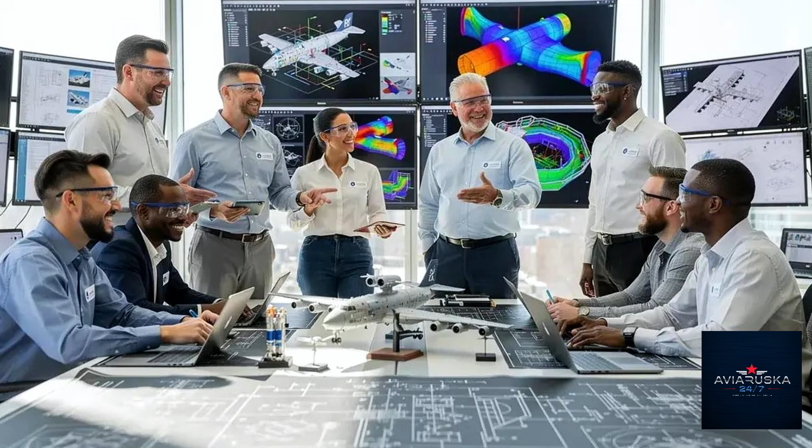The aircraft was the Irkut MC-21-300. The flight was May 28, 2017. And what nobody fully understood that morning was that this was only the beginning of a story far more complicated than anyone had planned for.

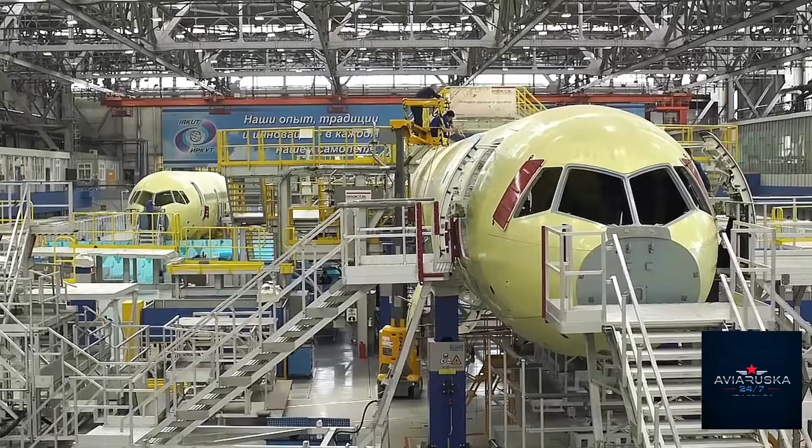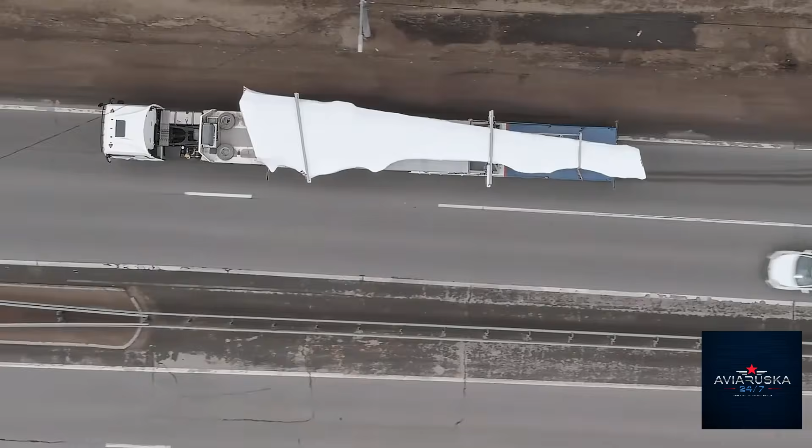To understand the MC-21, you have to understand what Russia's aviation industry looked like in the early 2000s. It wasn't pretty. The Soviet aerospace machine, once genuinely formidable, had largely collapsed after 1991. Aeroflot was flying aging Tupolevs and Ilyushins alongside a growing fleet of Boeings and Airbuses. Russian carriers were buying Western jets, not because they particularly wanted to, but because the domestic alternatives simply couldn't compete on economics, range, or passenger comfort.

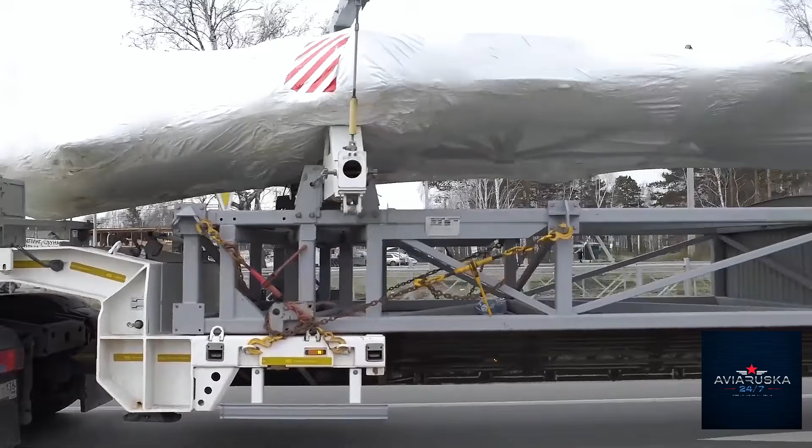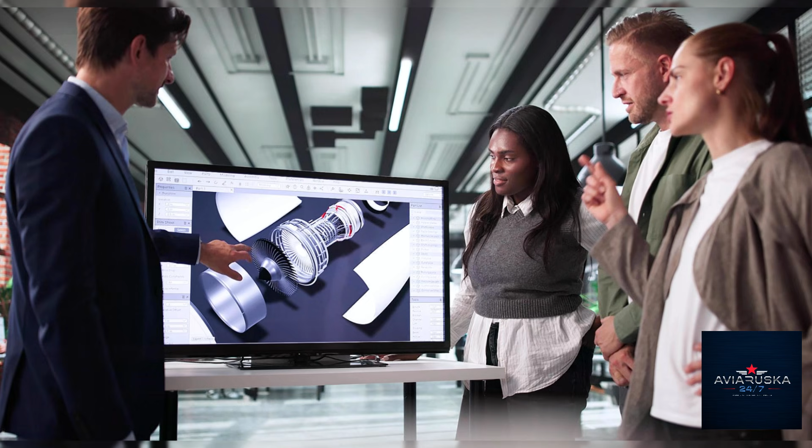The Tu-204 existed. The IL-96 existed, but their operating costs were punishing. Their fuel burn was high. Their interiors were dated. Maintenance costs were significant. Airlines made a rational business decision, and the Russian aerospace industry, once an empire, found itself increasingly irrelevant to the very carriers it was supposed to serve.

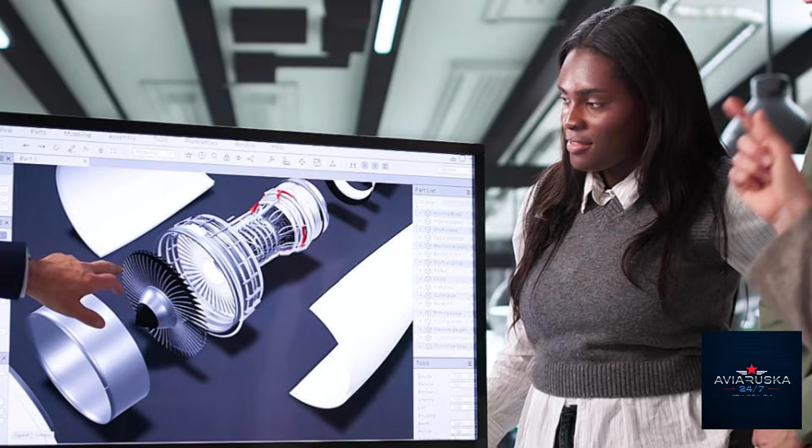The MC-21 was conceived as the answer to that problem. Not just a new airplane, a complete reset. The idea was to build a genuinely world-competitive narrow-body, something that could go toe-to-toe with the Airbus A320neo and Boeing 737 MAX on the metrics that actually matter to airlines: fuel burn, operating cost, passenger appeal, range.

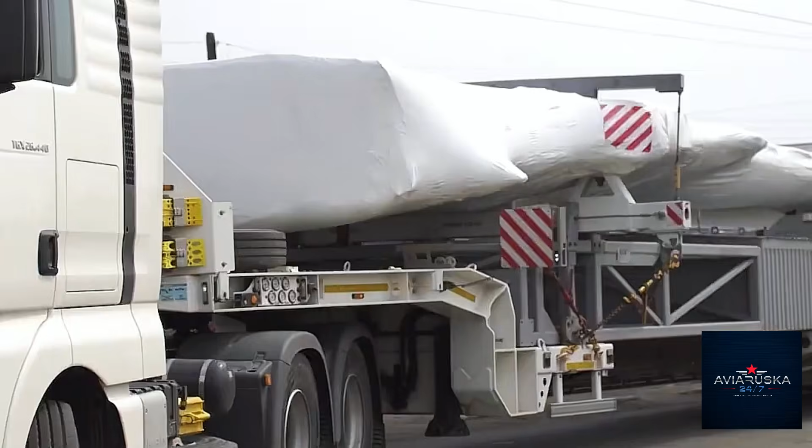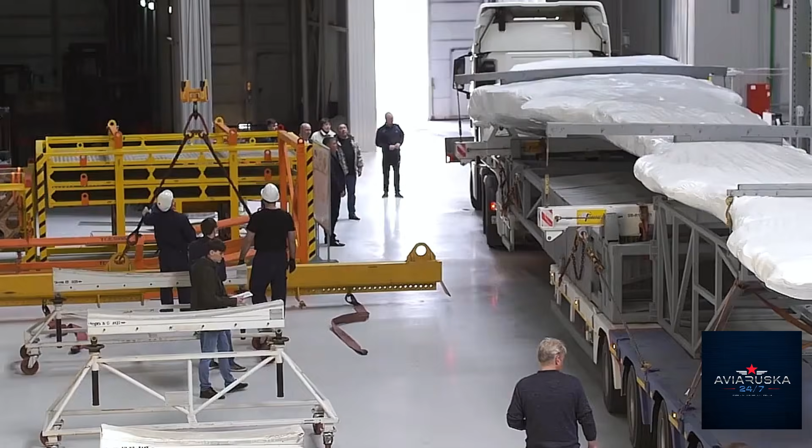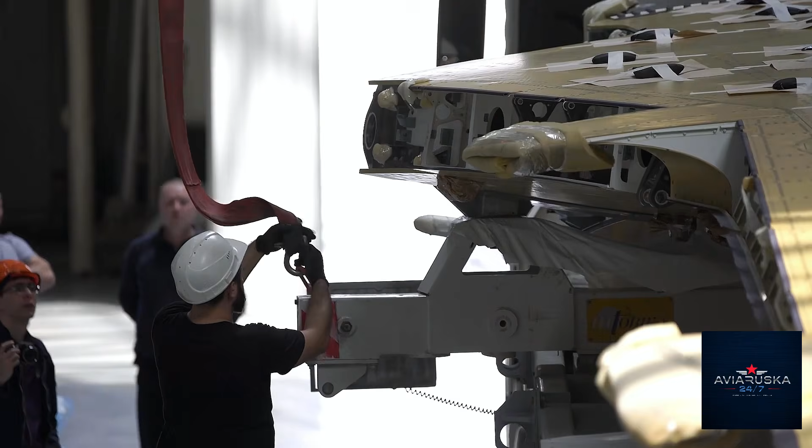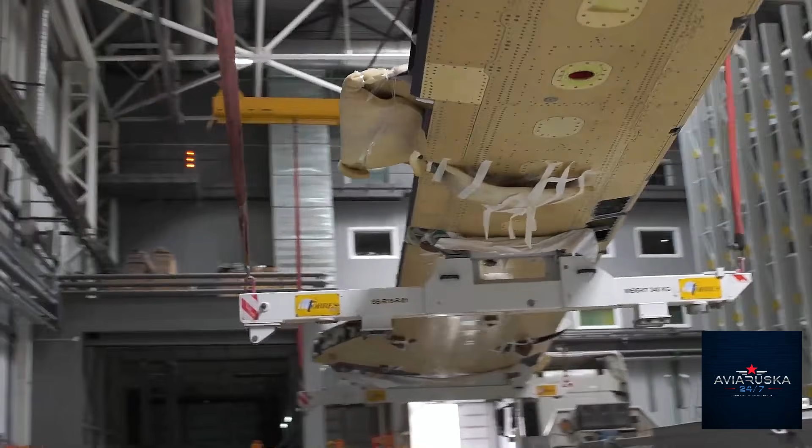The program was organized under Irkut Corporation, part of United Aircraft Corporation, the state-owned consolidation of Russia's major aircraft manufacturers. From the start, the MC-21 was designed with a global supply chain: Pratt & Whitney engines, Collins Aerospace systems, Western avionics, Western composite materials from Hexcel and Cytec. This wasn't naive, it was deliberate. Russia's engineers understood that certain components, particularly the high modulus carbon fiber used in the wing, weren't available domestically at the required specification. So they sourced globally, which at the time made perfect industrial sense.

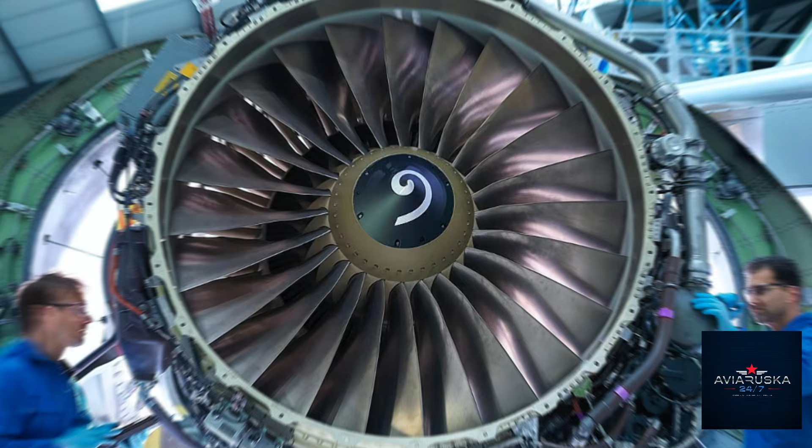Here's the detail that makes the MC-21 genuinely interesting from an engineering perspective: the wing. Not just any wing, a composite wing wider, thinner, and aerodynamically cleaner than most single-aisle aircraft in its class. The MC-21 features a high aspect ratio composite wing manufactured using a process called out-of-autoclave curing. Most composite aircraft structures, like the 787 and the A350, use large autoclaves, essentially massive pressure ovens that cure the composite material under heat and pressure. Irkut's manufacturing partner, Aerocomposite, developed an alternative process using vacuum infusion and UV or thermal curing outside the autoclave environment.

If this works as intended, and the evidence suggests it does, it represents a meaningful manufacturing advantage. Autoclaves are expensive, they're slow, they limit the scale of what you can produce. Out-of-autoclave composites, if properly controlled, allow for faster production cycles and lower capital costs.

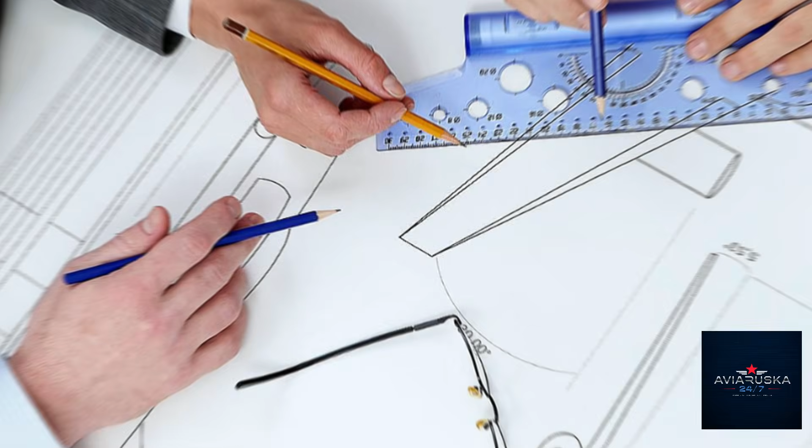The MC-21's fuselage is wider than the A320's. It gives passengers a slightly wider cabin cross-section, 6 abreast, but with noticeably more shoulder room. This was a deliberate commercial choice. Boeing and Airbus had both made compromises on cabin width in the single-aisle segment. The MC-21's designers decided to differentiate on comfort. Not a trivial decision, on short and medium-haul routes, the bread and butter of any narrow-body, passenger experience matters to airlines trying to compete for fare-sensitive travelers.

The composite materials for that wing, however, came from Western suppliers: Hexcel, Cytec, high-performance aerospace composites that Russia did not produce domestically at the required specification. This was the technical dependency that would later become a crisis. But in 2017, on that first flight day, it was simply the rational sourcing decision of a globally integrated program.

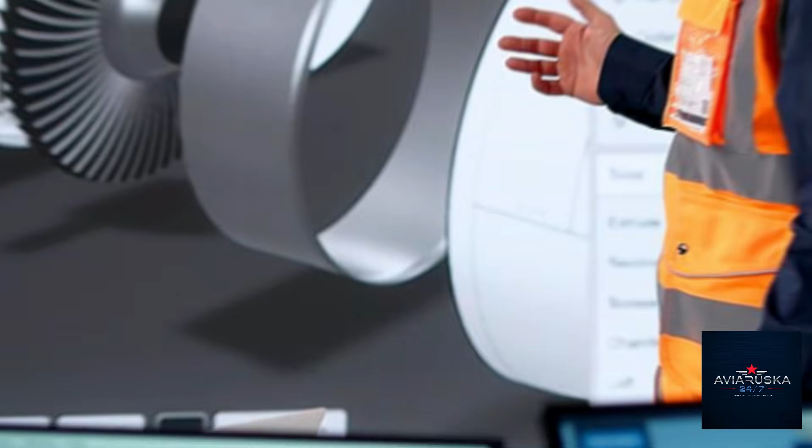Let's go back to that airfield in Irkutsk. The aircraft, tail number 73051, was crewed by two test pilots, Oleg Kononenko and Roman Taskaev, both honored as Heroes of Russia. The sortie lasted approximately 30 minutes. The crew evaluated basic handling qualities, stability characteristics, and propulsion performance. They simulated approach configuration, conducted a low pass over the runway, climbed, executed coordinated turns, standard initial envelope expansion.

Nothing extraordinary by test flight standards. But the significance wasn't in the maneuvers, it was in the fact that the aircraft flew at all.

The MC-21 program had been through years of delays. The rollout ceremony, when the aircraft was first publicly revealed, was June 2016. Russian officials had been projecting a possible first flight even earlier in that year. It slipped. These things always slip.

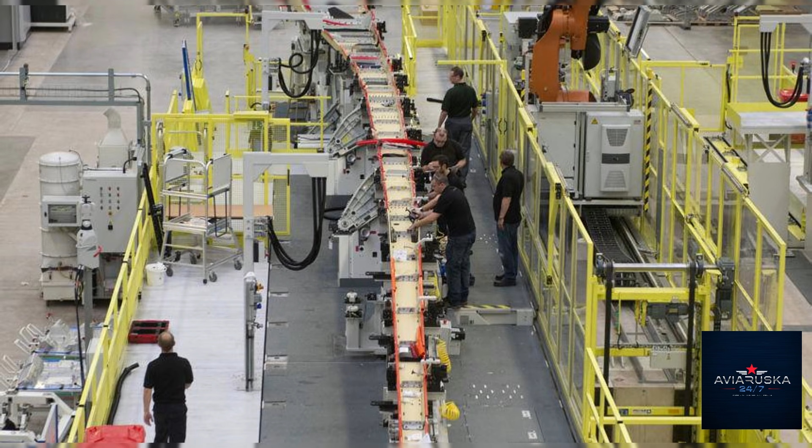But the 2017 first flight meant that the core aerodynamic design was validated. The wing worked. The flight controls responded as modeled. The Pratt & Whitney PW1400G engines, a variant of the geared turbofan that was also powering the A320neo family, performed within expected parameters. For Russian aviation, this was a moment of genuine industrial pride. Not nostalgia, not propaganda, real engineering achievement.

The country had designed and flown a modern narrow-body aircraft with a composite wing, advanced avionics, and a next-generation turbofan. And it had worked on the first sortie. That's not nothing. In commercial aviation, maiden flights that go smoothly represent years of analysis, simulation, and manufacturing precision all coming together at the same moment.

Then the world started to change. It didn't happen overnight. The first tremors came in 2018. Under the pressure of sanctions, initially related to the 2014 Crimea situation, but deepening through subsequent years, Western aerospace suppliers began reassessing their exposure to Russian programs. For the MC-21, this created a specific and serious problem.

The composite materials for the wing, the avionics from Collins Aerospace, the engines from Pratt & Whitney, all of these were sourced from companies operating under U.S. and European regulatory jurisdiction. You can debate the politics of sanctions all you want, that's not the point here. The point, from a purely industrial perspective, is this: Russia had built a genuinely competitive aircraft on a supply chain it did not fully control. And when that supply chain became uncertain, the aircraft's future became uncertain with it.

The response from Irkut and United Aircraft Corporation wasn't panic. It was a pivot. A hard, expensive, technically demanding pivot, but a pivot nonetheless. The decision was made to redesign the MC-21 around a domestic materials and systems baseline. This gave birth to the MC-21-310. Same fuselage, same basic aerodynamic configuration, but with Russian composite materials, Russian avionics, Russian engine.

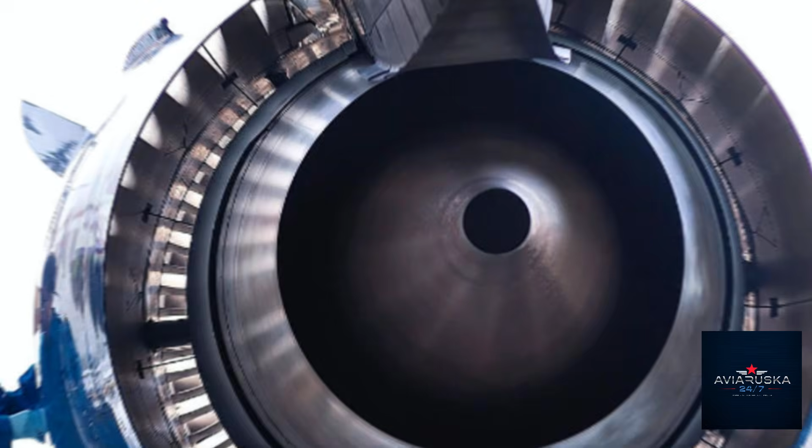The problem was that none of those Russian alternatives existed yet in production-ready form. They had to be developed, certified, and integrated into an aircraft that was already flying. The most significant single change in the MC-21-310 is the engine. The Pratt & Whitney PW1400G, a world-class geared turbofan, was replaced by the Aviadvigatel PD-14.

Let's talk about what that actually means. The PD-14 is Russia's first wholly new civil turbofan engine since the Soviet era. That's not a marketing claim, that's an engineering reality. For decades, Russia had been modifying, upgrading, and extending engine designs that traced their lineage back to Soviet programs. The PD-14 broke that pattern. It was a clean-sheet design, developed under the Perm engine company, Aviadvigatel, with significant involvement from Russia's CIAM Research Institute.

The engine received Russian type certification in October 2018. That certification was itself a milestone. Russia hadn't certified a new civil turbofan in a very long time.

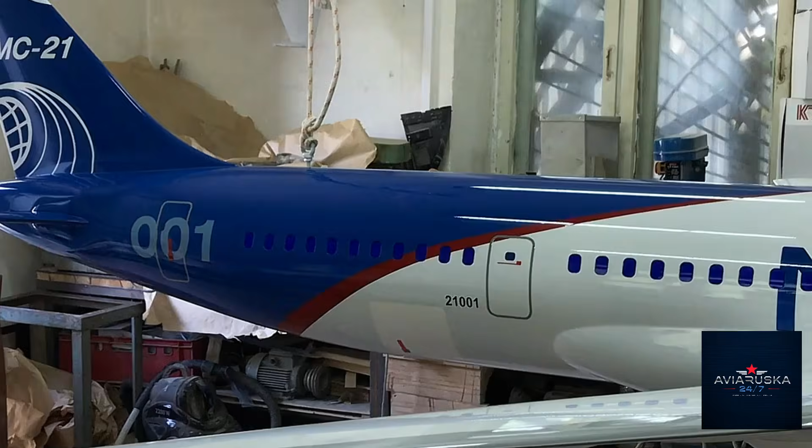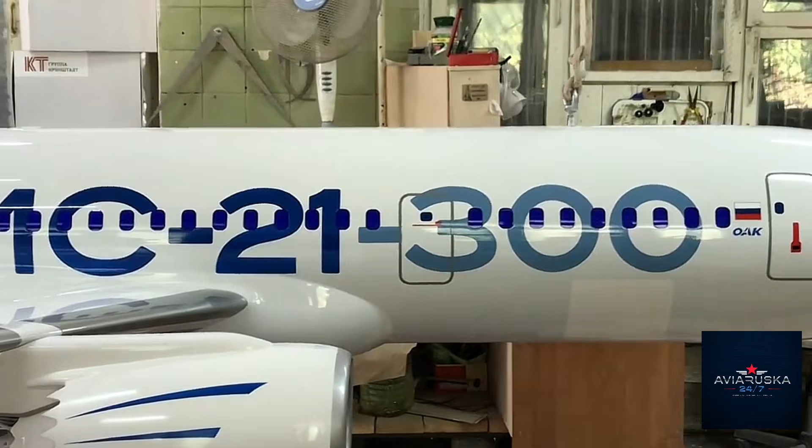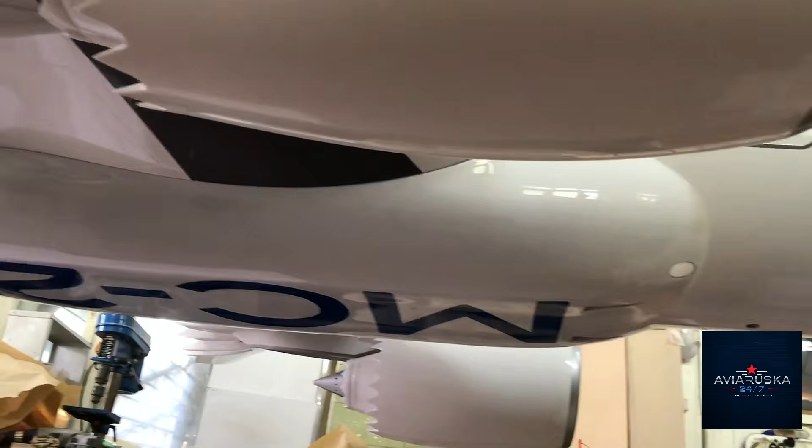Now, is the PD-14 competitive with the PW-1400G? Honestly, that question is still being answered. The PD-14's specific fuel consumption figures and overall thermodynamic efficiency are not publicly confirmed to the same degree as Western competitors. Russian officials have claimed performance parity. Independent aviation analysts have been more cautious. The PD-14 uses a turbofan bypass ratio and overall pressure ratio in the same general range as modern Western engines. But there are real questions about materials technology, particularly high-temperature turbine blade alloys, where Western manufacturers have decades of accumulated process knowledge. Closing that gap isn't impossible, but it takes time, and it takes testing.

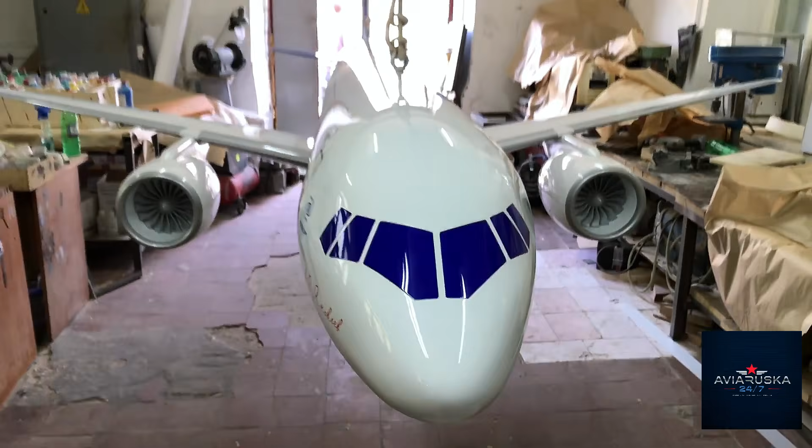What's beyond debate is the strategic significance. If Russia can operate a modern commercial aircraft on a domestically produced turbofan engine, it has broken the most fundamental dependency in civil aviation. Every aircraft flies on its engines. If you don't control the engines, you don't control the program.

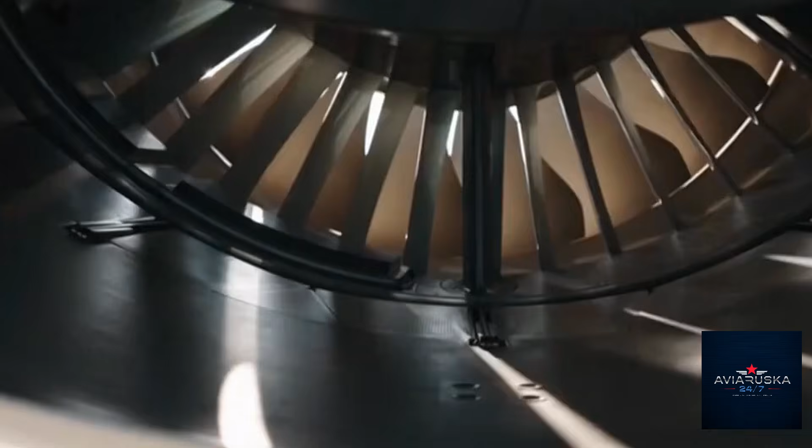The first flight of the MC-21-310 on December 15, 2020 wasn't just an aeronautical event. It was a statement about industrial policy. The engine was actually the simpler problem, because Russia had a baseline of turbine technology to build on.

The composite material story was harder. Here's why. Aerospace-grade carbon fiber composite, specifically the high modulus, high-tensile type used in primary structure, is one of the most technically demanding materials in modern manufacturing. It requires precise fiber production, controlled resin chemistry, exacting manufacturing process parameters, rigorous quality assurance, certification against demanding fatigue and damage tolerance standards. Hexcel and Cytec, the Western suppliers originally specified for the MC-21 wing, had spent decades refining these processes. Russia's Umatex, a Rosatom subsidiary, was tasked with developing the domestic equivalent.

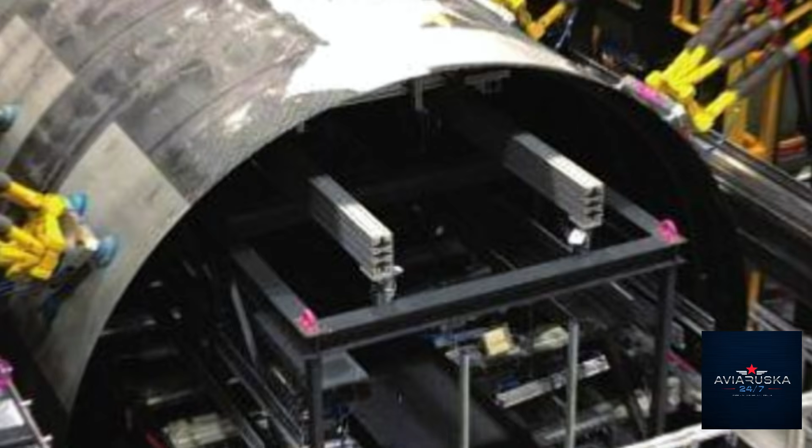That's not an impossible task, but it's not a quick one either. Carbon fiber production requires specialized precursor materials, high-temperature processing equipment, and process stability that can only be proven through extended production runs. The fact that Umatex eventually produced materials that could be certified for primary aircraft structure is a genuine industrial achievement. Whether it happened on the schedule originally projected, almost certainly not. Whether it required compromises in specification, that's still not entirely clear from public information.

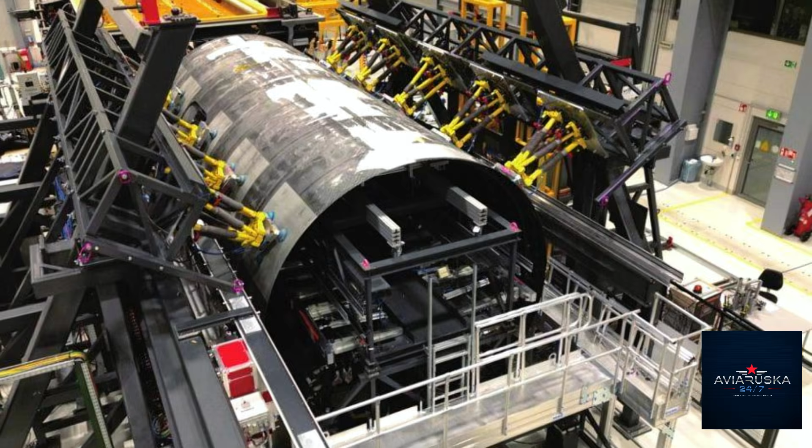What is clear is that between 2019 and 2021, the MC-21 program underwent a materials substitution process that essentially redesigned the manufacturing baseline of the aircraft's wing. The geometry didn't change. The aerodynamics didn't change. But the materials, the manufacturing processes, and the certification documentation all had to be rebuilt from scratch.

If 2018 was the first supply chain shock, February 2022 was the complete severance. Following Russia's invasion of Ukraine, Western aerospace companies, Boeing, Airbus, Pratt & Whitney, Collins, GE, suspended all Russian programs and parts supplies.

For the MC-21, this meant that any remaining Western content in the avionics, electrical systems, flight control computers, and onboard computing architecture had to be replaced. Not gradually, immediately. This is where the MC-21 story becomes something genuinely unusual in aviation history.

Most aircraft programs experience supply chain disruptions. Most aircraft programs face certification delays. Some aircraft programs get canceled. But very few aircraft programs in the modern era, with a modern certification standard, have been comprehensively redesigned mid-development to eliminate virtually all foreign content.

The 2022 sanctions wave meant that Russia had to develop or locally source avionics computing hardware, flight management systems, air data systems, communication and navigation equipment, electrical generation and distribution systems, hydraulic components, braking and ground systems. The list is long, and for each system the process is the same.

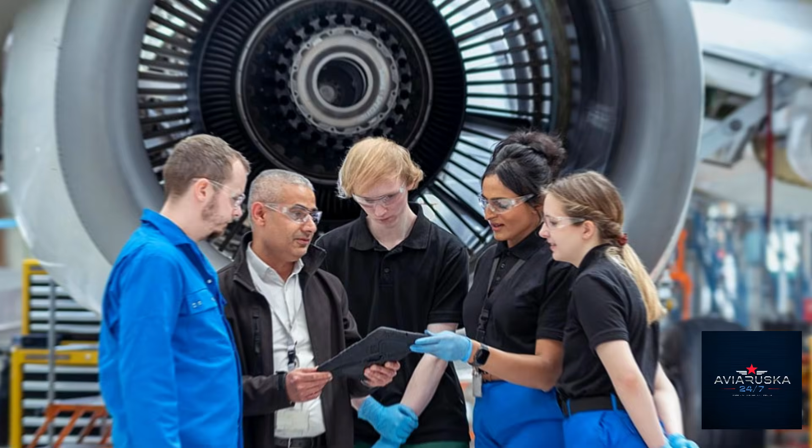This explains why the MC-21's entry into commercial service has continued to slide into the late 2020s. It's not that the basic aircraft doesn't work. The MC-21-310 has been flying with the PD-14 engines since 2020.

It's that the certification process for the comprehensively localized configuration, with all Russian avionics and systems, requires an enormous amount of flight test validation. Every system change requires data. Every data point requires flight hours.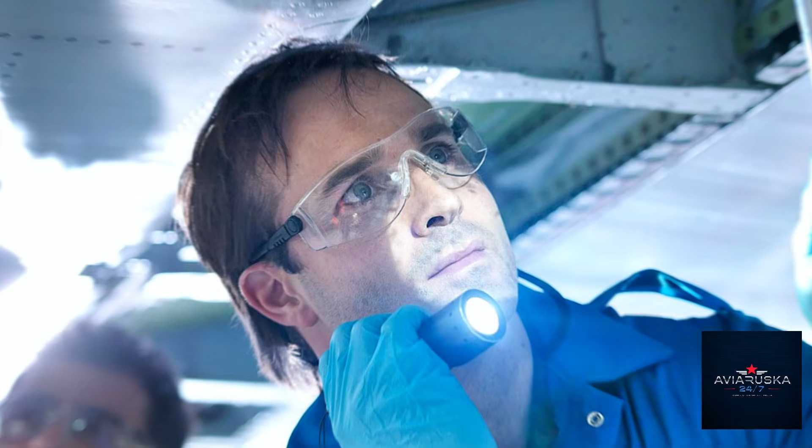Here's something worth explaining. When aviation programs talk about certification, they're not talking about a rubber stamp. They're talking about a structured, legally binding demonstration that an aircraft meets defined safety standards across its entire operating envelope.

For a new aircraft, this means thousands of flight test hours, hundreds of individual test points, defined airworthiness criteria for every system, flutter testing at limit airspeed, stall testing across configuration matrix, engine failure demonstrations, icing certification, electrical system failure cases, emergency descent profiles, evacuation certification for the cabin.

Now imagine doing that, and then changing half the avionics. You don't just update the software. You rerun the system-level tests. You redemonstrate the failure cases. You recertify the human-machine interface. You generate new flight manual data.

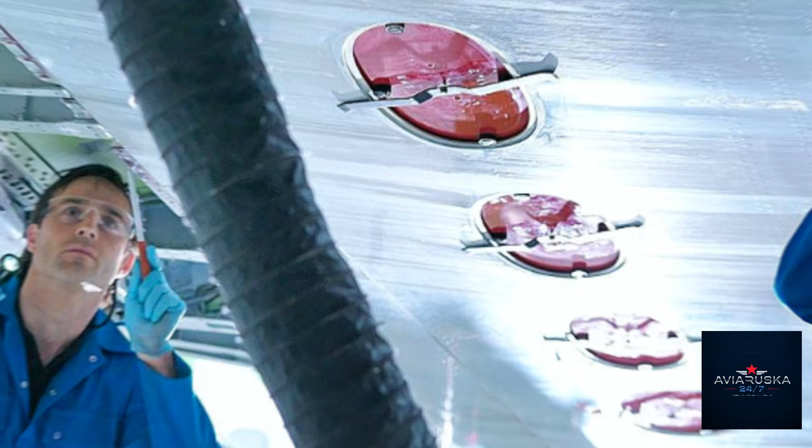This is what the MC-21 program has been doing since 2022, running a certification campaign for an aircraft that keeps getting new components. And here's the additional complication.

Russia's certification authority, the Federal Air Transport Agency or Rosaviatsia, is no longer pursuing EASA validation or FAA recognition. That door has been functionally closed by the geopolitical situation. So the MC-21 will initially enter service certified only for Russian operators. That's a significant market limitation.

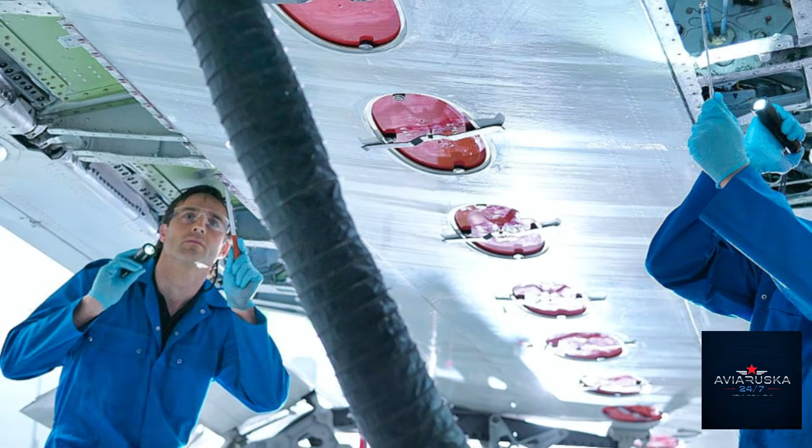Not fatal. Russia's domestic aviation market is large enough to absorb meaningful MC-21 deliveries. But it means the aircraft cannot, for now, be sold to airlines in most international markets.

Let's talk honestly about what this costs. Building an aircraft is expensive. Boeing spent somewhere in the range of $30 billion developing the 787 Dreamliner. Airbus spent a comparable figure on the A380. Those are programs with global supply chains, decades of institutional knowledge, and full access to the world's most advanced aerospace materials.

The MC-21 has been developed with significant state funding. Russia's government has consistently supported the program as a matter of industrial policy. But the costs of the localization program, the composite materials, the PD-14, the avionics replacement, have been additive to the original budget. Every redesign costs money. Every recertification costs flight hours and engineering labor. Every domestic supplier relationship has to be built with significant upfront investment before a single component is shipped.

The economics only make sense if you think about it strategically. If Russia can eventually produce the MC-21 with fully domestic content, it controls its own aerospace capability, it doesn't depend on foreign suppliers that can be sanctioned. It retains the engineering talent to maintain and evolve the program.

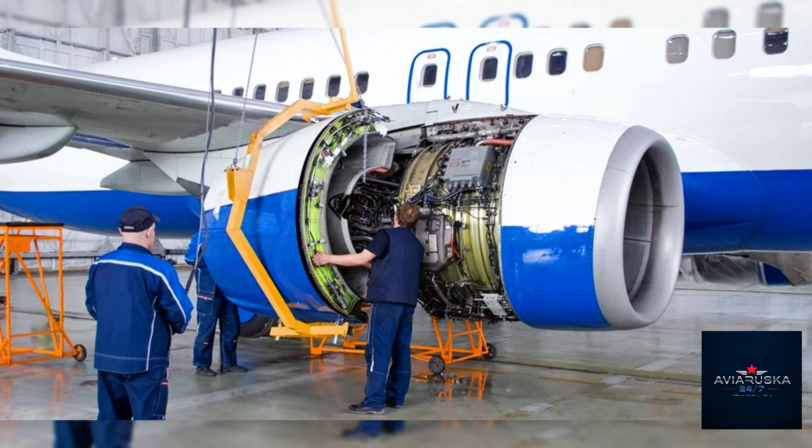The pressure to get the MC-21 into service is genuine. It's worth pausing here to compare two parallel stories. Russia's MC-21 and China's COMAC C919 are often mentioned in the same breath, two large countries trying to build narrow-body aircraft to challenge Boeing and Airbus. But the strategies have been different.

The C919 was developed with a fundamentally different approach to foreign content. COMAC deliberately retained Western avionics, systems, and engines, specifically the CFM LEAP-1C, as the certification baseline. The logic was: get the aircraft certified to international standards with trusted Western systems, then incrementally develop Chinese alternatives over time. The MC-21 began with a similar logic: use best available global components, demonstrate the aircraft's performance, then build domestic capability alongside. The difference is that China's program has not been subjected to the same level of supply chain severance.

The C919 is currently operating in commercial service with Chinese airlines, using Western engines and avionics. The MC-21 has been forced to pursue localization much faster than planned, under much more difficult conditions. Neither strategy is obviously correct. China's approach left it dependent on Western suppliers who could theoretically impose restrictions in the future. Russia's forced localization has created a genuinely independent capability, at enormous cost and delay.

What the comparison reveals is how deeply modern commercial aviation is embedded in global supply chains, and how costly it is to exit those chains under anything less than ideal conditions.

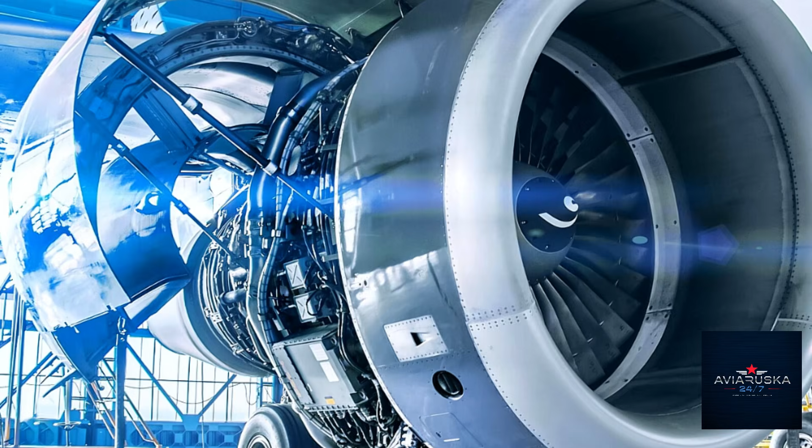The questions that remain are practical ones. Can Russia produce the MC-21 in the volumes its airlines need? Can the program's unit economics be competitive enough to win orders outside Russia? Can the domestic avionics and systems meet the reliability standards that airline operations demand? These aren't rhetorical questions. They're answered through years of airline operations, maintenance records, and dispatch reliability data. None of that data exists yet.

That morning in Irkutsk in May 2017, the people on the tarmac thought they were watching the beginning of a straightforward success story. Russia had built a modern aircraft. It flew. The engines worked. The wing was beautiful.

What they couldn't have fully anticipated was that the aircraft they were celebrating would spend the next decade being essentially rebuilt, not because the design was wrong, but because the world around it changed. Sanctions. Supply chain severance. Geopolitical fracture.

These aren't engineering problems. They're political ones. But they land on engineers. They land on production floors. They land on certification schedules. And they land on the airlines waiting for new jets that keep getting pushed to the right.

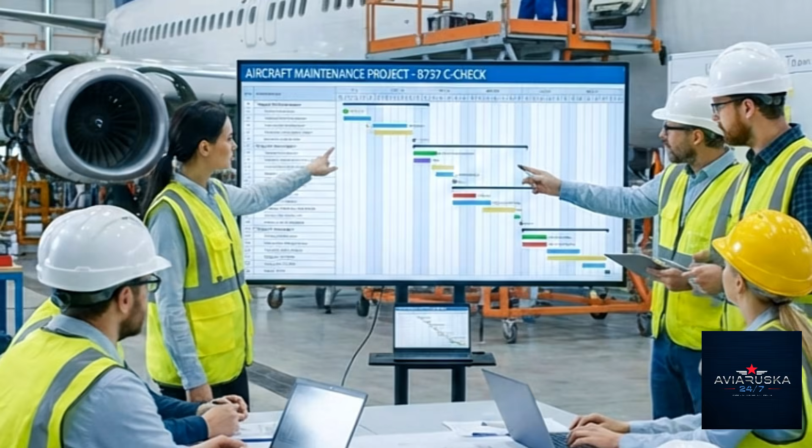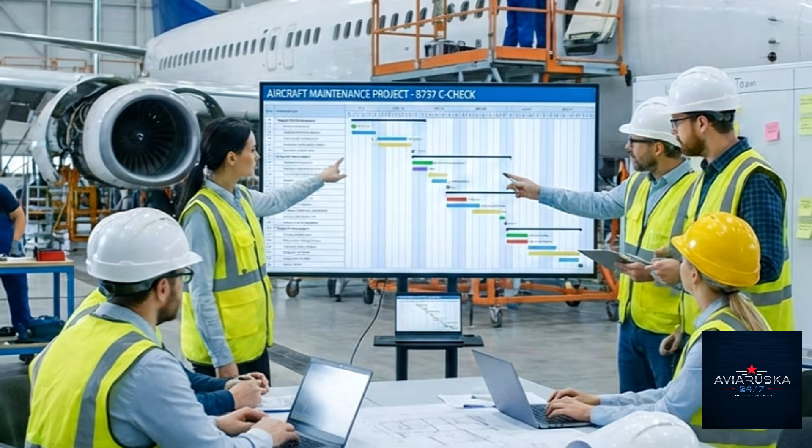The MC-21 will eventually enter commercial service. The question isn't really whether, it's when and in what form and for how many operators. What it will represent when it does is something rarely achieved in the modern era: an aircraft built under maximum industrial pressure, on a supply chain that had to be invented as the program ran.

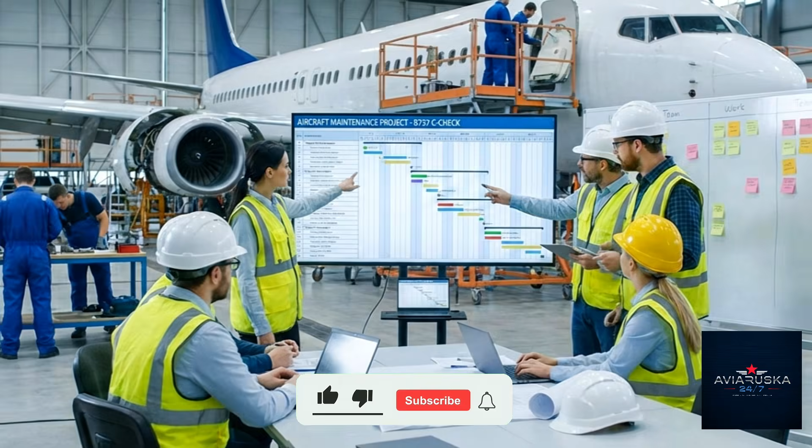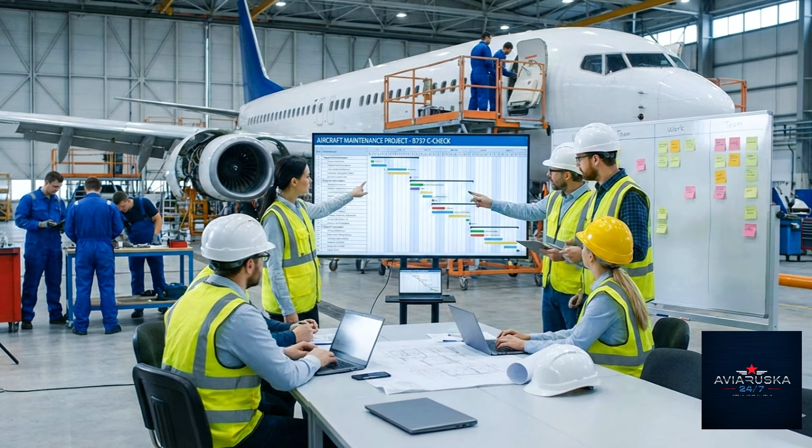That's not a story about geopolitics. That's a story about what engineering actually is. Not elegant drawings on a white wall. Not CAD models and simulation runs. Engineering is what happens when the world stops cooperating and you have to build it anyway.